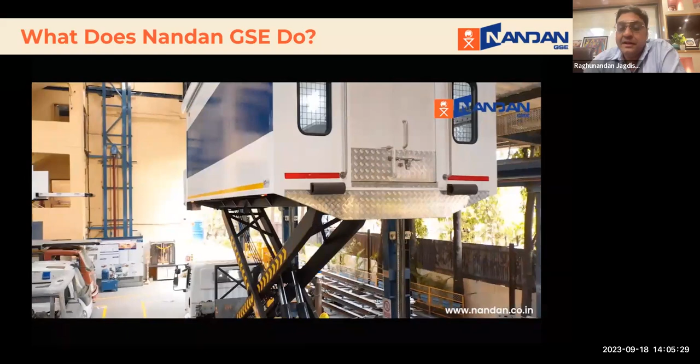So coming back to the factory - because for both chemical and pharma, it's not really a work-from-home kind of thing, you can't produce medicines or chemicals from home. The factory is an important angle wherever you are at.

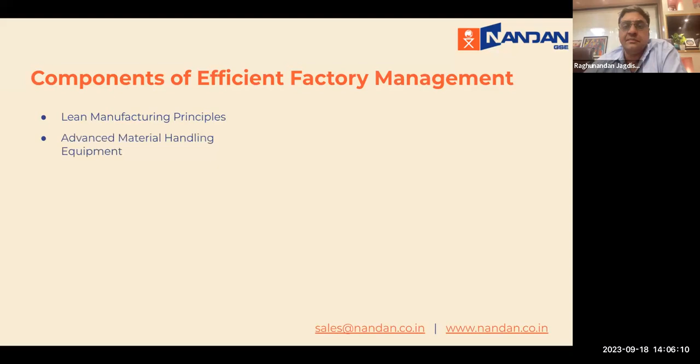So in terms of efficient factory management, there are a few principles, each a topic in itself. Lean manufacturing practices are really the ones which will help you save, and material handling is core to that. You can look at efficient production scheduling, real-time monitoring, analytics using a lot of IoT and ML as it goes ahead. Factories are getting smarter.

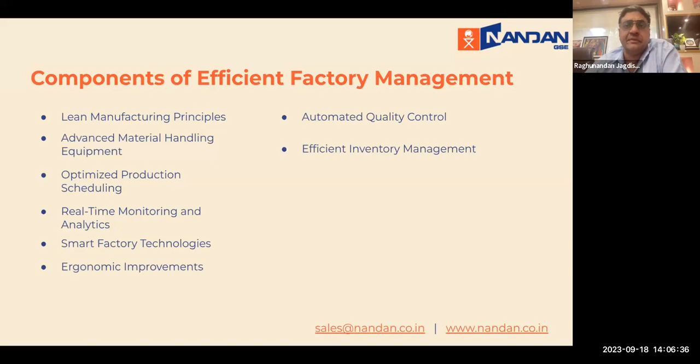I'm not too sure whether people are, but yes, factories are getting smarter. There's a lot of ergonomic improvements happening, and a lot of QC is today automated, where automatically down the line you're able to create that. You're using a lot of energy efficiency. Even at Nandan, for example, we have 60% of our power coming from solar. So sustainability is very important in everything we're doing. And there is a lot of cross training that happens.

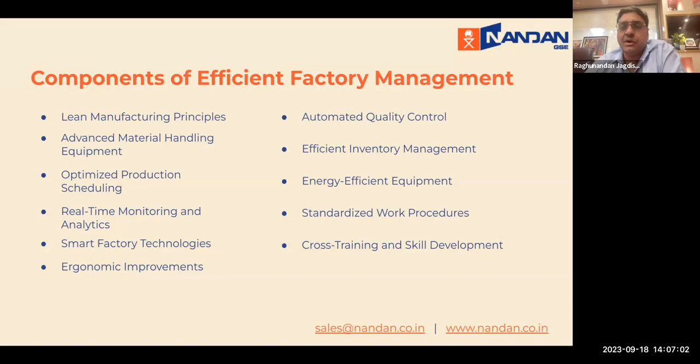So from all these topics that you saw in the previous one, I am going to basically focus on the material handling bit. What are the small things that you can do on an immediate basis to improve yourself there? So when the focus is on efficient material handling, that's core to what I'm going to be talking to you about. My name is Dr.

Raghunandan Jagdish, as was introduced by Sangarsh, and I've been the CEO of Nandan for a long time, and we are working on improving productivity, performance, and safety. So I think I know a little bit or two about material handling. That's why we're sharing this.

You need to identify your bottlenecks. Bottlenecks are those places within the factory where everything comes and gets stalled. So even if you eliminate bottlenecks immediately, your factory efficiency can go up by 13% by zero cost improvement. So that's an important part.

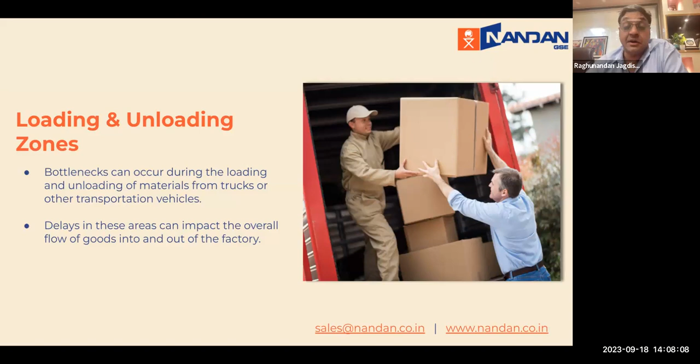And in those bottlenecks, your loading unloading zones are an important place where trucks can come, they stall, they block the space, they block the time. There's a lot of manual handling. There's ergonomic problems because people are handling them in a very unsafe manner.

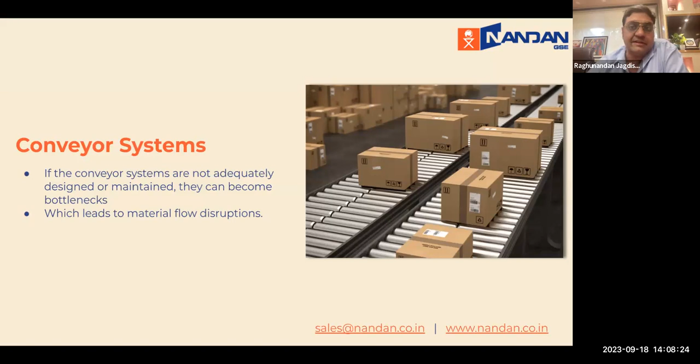Conveyor systems, yes, you do have conveyors all throughout the factory, but if they're not well designed, the speed of the conveyors, the location, the way the transfers are done, it could lead to some bit of bottlenecking and inefficiency.

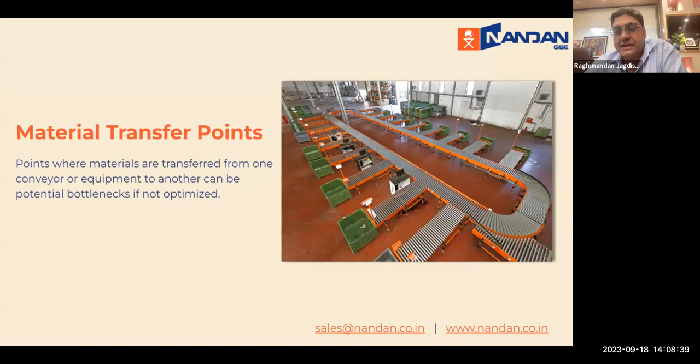Material transfer points are an important one. The more the material transfer points, the more flexible the system should be. But what also happens at some point of time or the other, the system can collapse. So you need to be very careful about it.

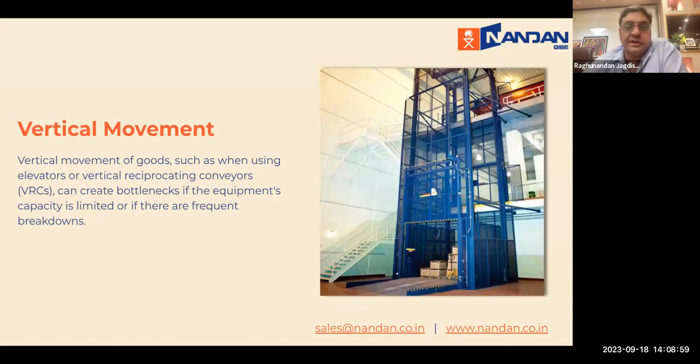There's a lot of vertical material movement, that is from the ground floor to the upper levels, that you need to take. Waiting for the lift breaking down, things not fitting inside - these are all problems that do occur in vertical movement. So you need to be very careful about that, and they will create a lot of bottlenecks in the system.

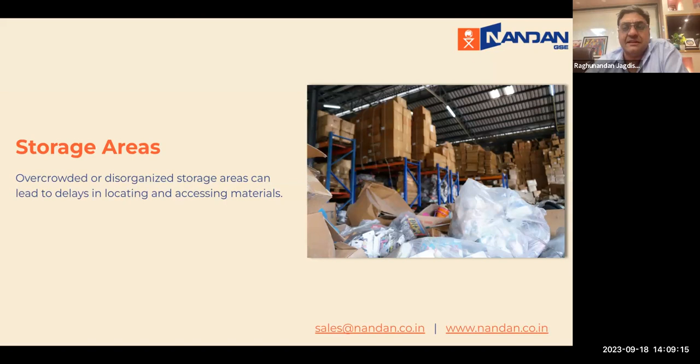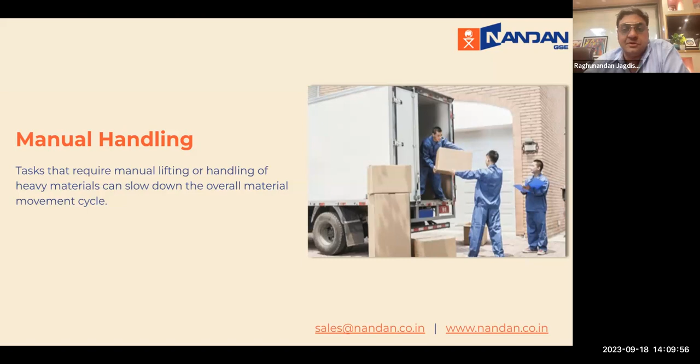So when you design your own factories and layouts, be very careful about them. Again, wherever there is manual handling involved, that means a man can only lift 30 kgs, or if he's really strong, about 50 kgs, but not more than that. And even that has a long-term impact on his health. So wherever there is manual handling involved, there is going to be a slowdown, and there are going to be risks which will lead to bottlenecks.

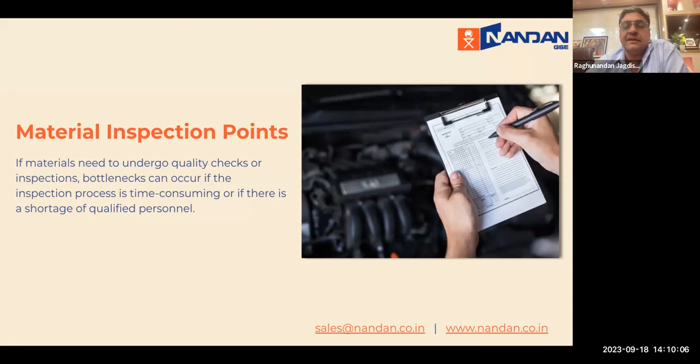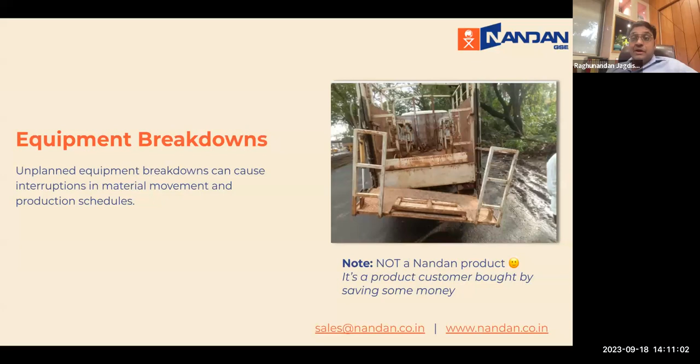And at other times, you might want to do handling, but you don't have equipment, so the quantity might be less. Since we're talking about the two core industries of pharma and chemical, there is a lot of similarity in what you're trying to do.

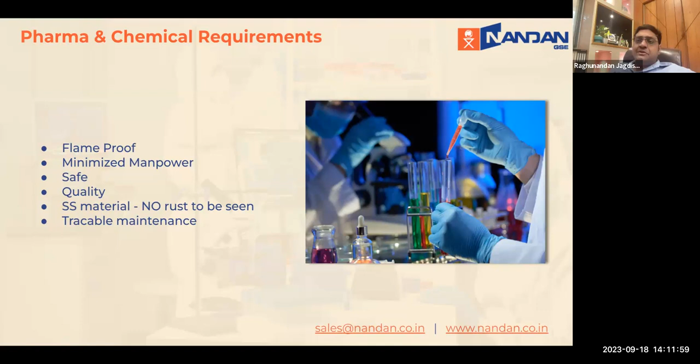You want most of your equipment to be flame proof because chemicals or pharma too, there could be a lot of fire hazards. So in order to mitigate that, you will always need to flame proof your equipment of all sorts. You want to minimize manpower because the more the number of people, the more the risks. You want it to be safe and have high quality, of course. Most of the material should be stainless steel so that no rusting is seen anywhere. And there has to be a traceable maintenance, which is definitely part of GMP, the good manufacturing practices. In fact, even ISO 9001 requires that you keep maintenance traceability.

Yeah, that's a few thoughts on the material handling that comes in. And now what I'm trying to give you is... but coming back to the topic at hand, which we began with, I would like for you to again look into this.

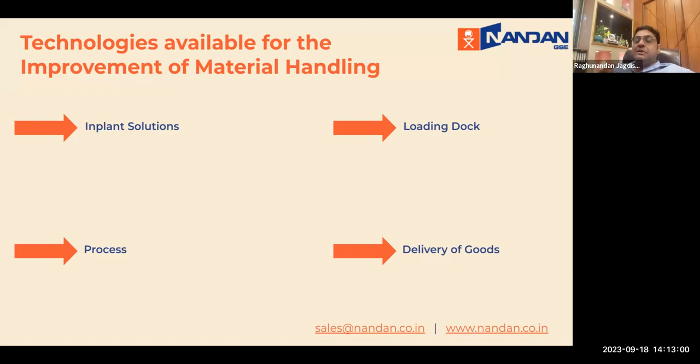So a few of the technologies that are available, again we divide it into 4 parts. You have inplant solutions that is within your factory. You have the dock, the truck interface, loading, unloading. You have during the process and also delivery of the goods at the customer's end.

So in inplant, one of the solutions you can use is a hydraulic scissor lift. A scissor lift, because it has got an X and it's called a scissor, is a fantastic mechanism in which the platform remains horizontal always and it goes up and down. You can use this from anywhere between 500 kg capacity right up to 100 tons to move the material up and down.

It's got a lot of complexities like ramps on either side. It could have rollers, conveyors, tilters, etc. So for movement of material between two levels, instead of having a slope, you would just put a scissor lift there, put your thing on it and go up and take it out. That saves a lot of effort for the human being, plus it improves your safety requirements.

Second, you of course have pallet trucks, which are ubiquitous everywhere in the pharma and chemical industry. But if you go for a battery operated one, it makes the move very simple. It's always braking automatically, it won't roll down, and one person can move even 1 ton very easily. This is more important because nowadays in factories there's a lot of female workforce, and when they come in, they find it difficult to move the pallet truck. Battery operated pallet trucks make it very easy.

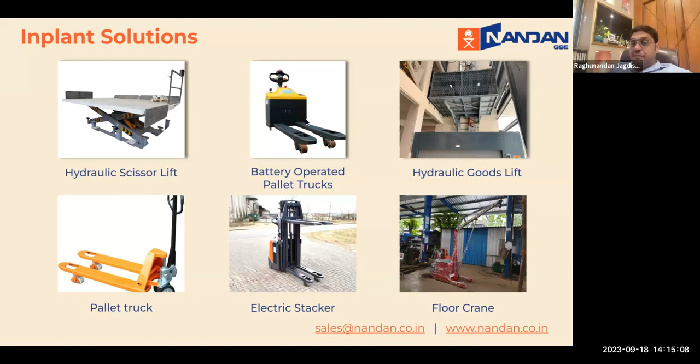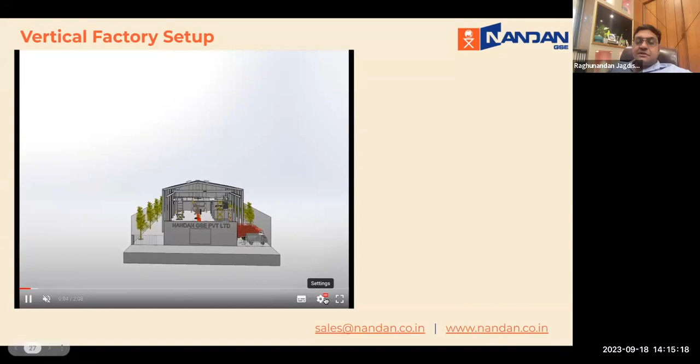So you can make it go as high as possible. Within the factory, when you want to move material vertically, you can think about the hydraulic goods lift. For loading and unloading, you can think about the stacker or the crane. For movement of material, you use battery operated pallet trucks, etc. So I'd like to show you something that my team has made, it's a system called... yeah, it's a system called vertical factory.

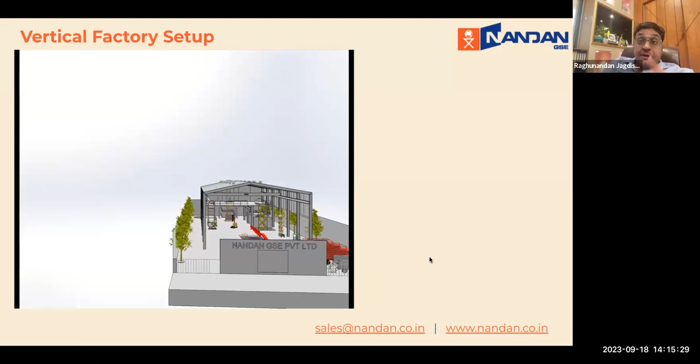Typically, what are the different systems that you can use within the factory to make your movement more efficient?

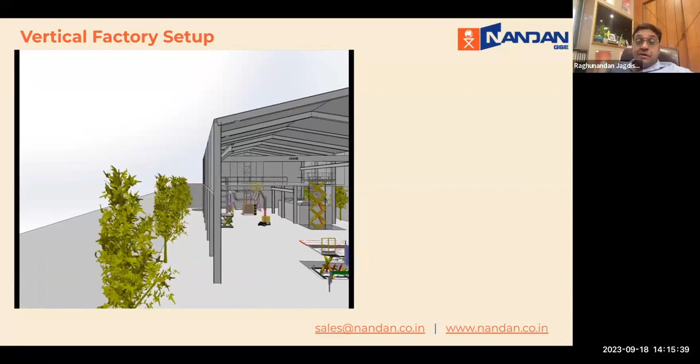This is an animation, work in progress. You're one of the first clients to actually see it, but I thought imperfect action is better than perfect inaction.

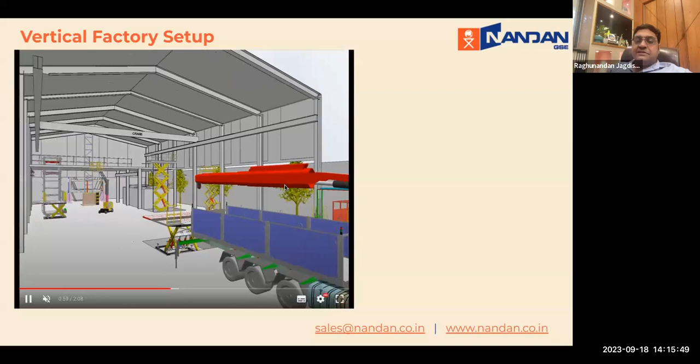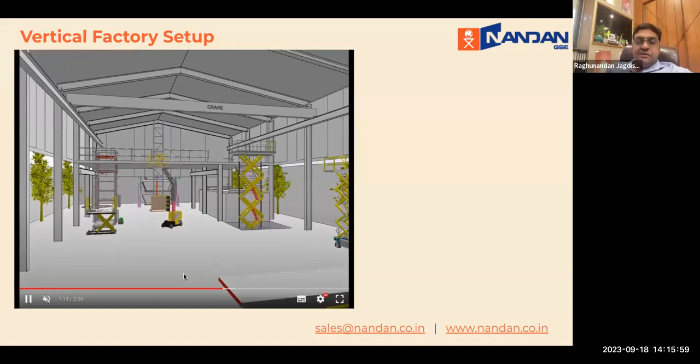We have knuckle boom cranes that are useful for loading and unloading trucks. That is how a scissor lift is used to unload from the truck, so you can get it on the scissor, and then the lift comes down and you take it down. This can be with wheels so that you can move them around. This is a goods lift.

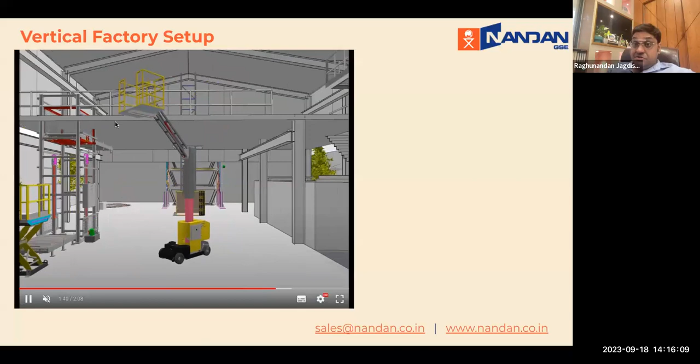If you make a mezzanine, which is very predominant in chemical and pharma, you can install a goods lift without any RCC work. It is fully freestanding and you can get this going.

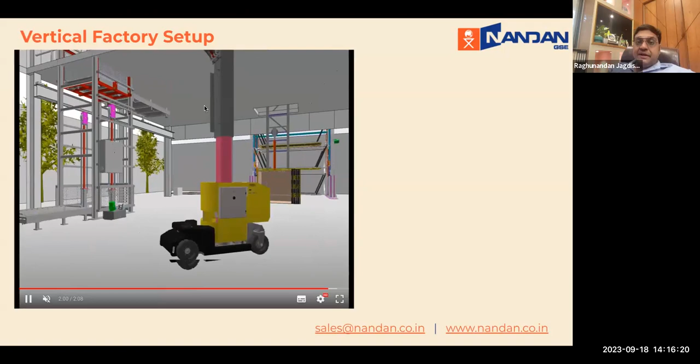For vertical reach of your machines, you have different systems. You can rotate trolleys, you can rotate trucks on a system called a turntable. This turntable is on the ground, and it can rotate 360 degrees.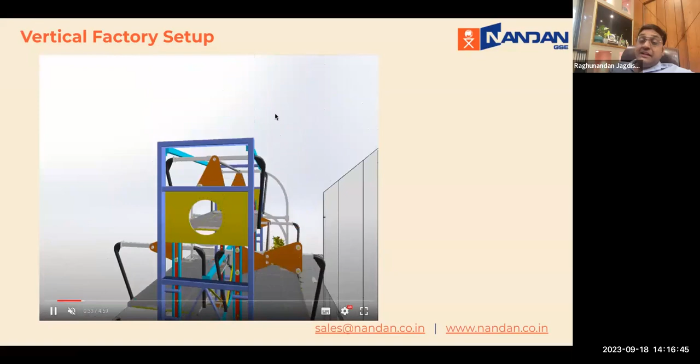For parking or material storage vertically, you have a carousel. In this carousel, you don't need a forklift to load material and keep it at height. You just put it down on the ground floor and press a button, it rotates, comes down, and you remove the pallet from that. So everything is on the ground level.

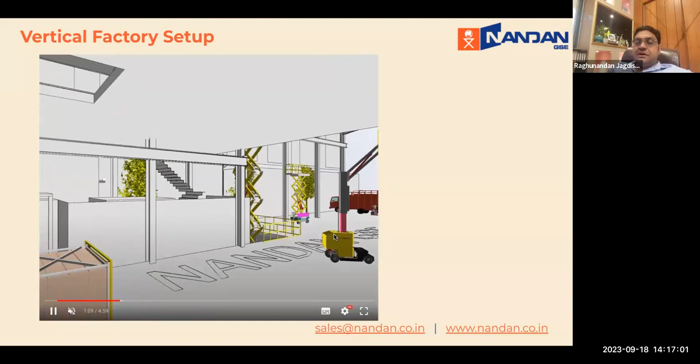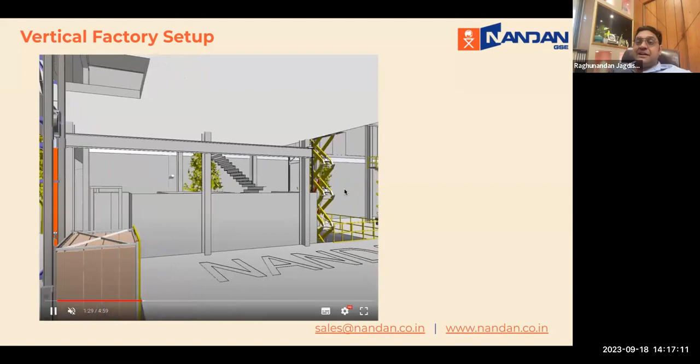That's a hydraulic lift again. However, you can see that this is a scissor lift. A scissor lift is not just 1x, it can go multiple heights. Because of the scissor lift reaching multiple heights, you can install them and make your mezzanine more useful. Without a separate lift, you can just install a lift like that, make a pit, and put it down.

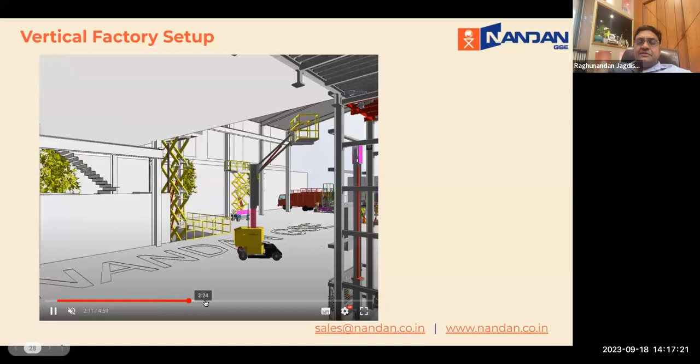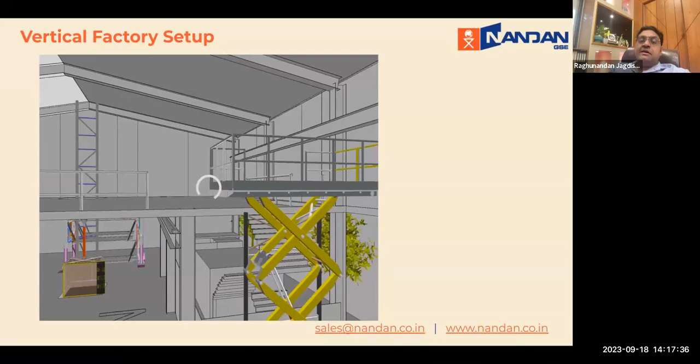We do have different kinds of truck loading and unloading systems, called column tail lifts. Instead of moving material by hand, you would just use a trolley to move things. So even here, the steps are only for human walking, but the materials are sent up and down in the scissor lift itself.

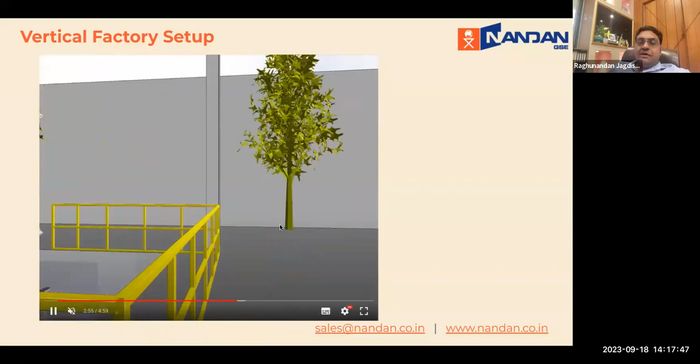So that's a scissor lift going up and down. We have towing scissor lifts, useful for maintenance. OSHA's regulations state that you can't go more than 3 meters using a ladder.

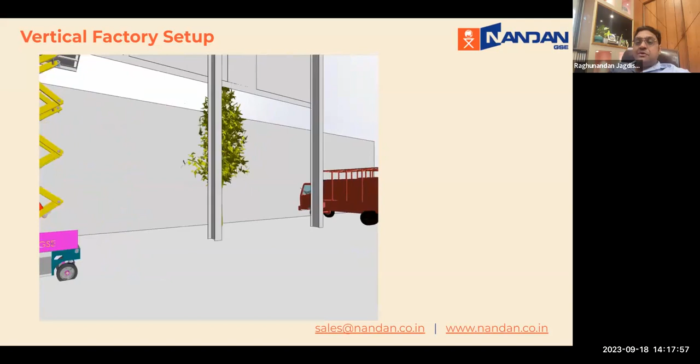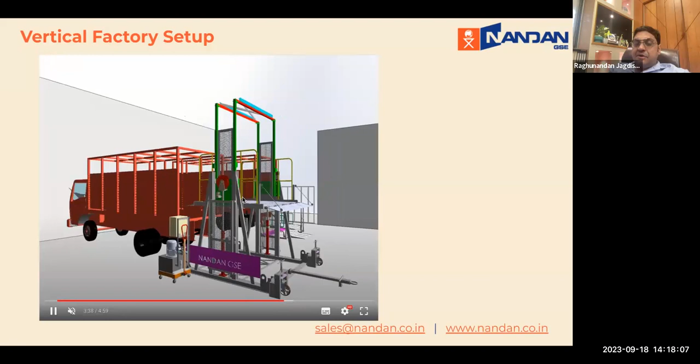So you need to be very careful when dealing with an international audience and want to remain compliant with the laws. You can have this, called a towable truck loader. The platform goes up and down and you can load into a truck without a dock. When it comes down, it is fully on the ground and loads into the truck.

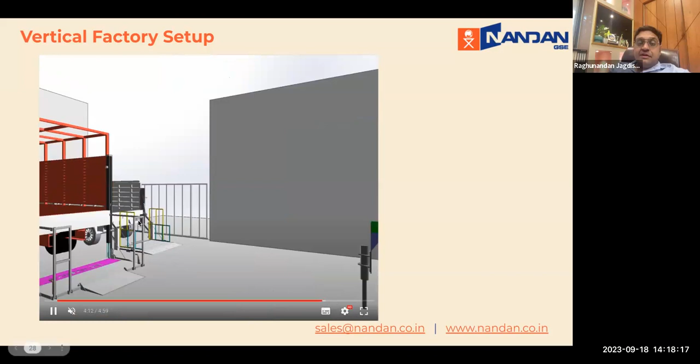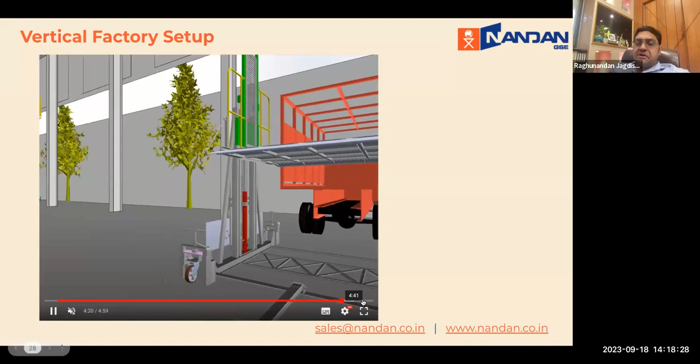There are different kinds of tail lifts on truck backs, which you can just load onto the truck itself and use for deliveries. Most of the time your logistics companies would do that, but in your case, maybe that becomes a sustainability point.

In short, that is like a vertical factory, how it goes. Hydraulic goods lifts are useful for traveling up and down. You can make them freestanding, or you can put them into a shaft.

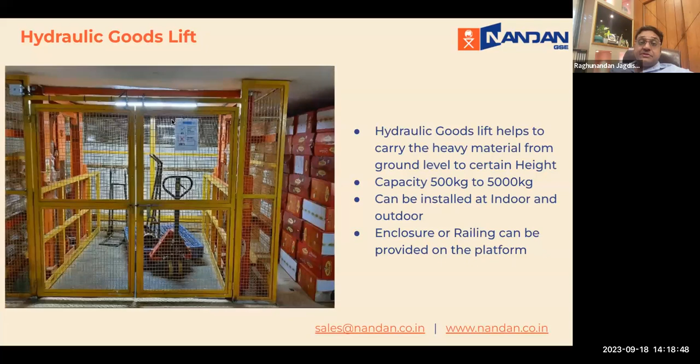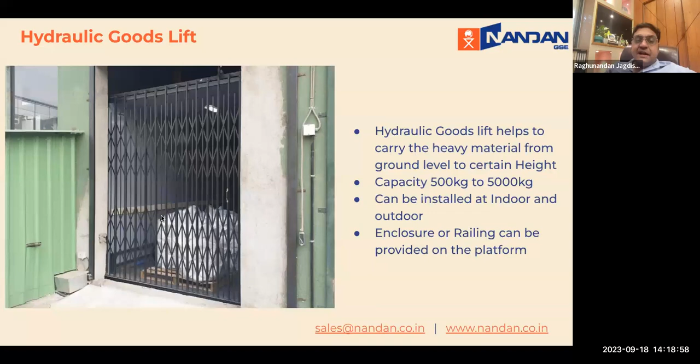You can make it go as high as 25 meters, and you can make capacities as much as 10 tons. We've done a 10-ton lift, which takes a forklift plus a lot of material and goes up and down. The benefits are, because it is hydraulic, there is no rope breaking, it's much more energy efficient, and it's got a very long service life.

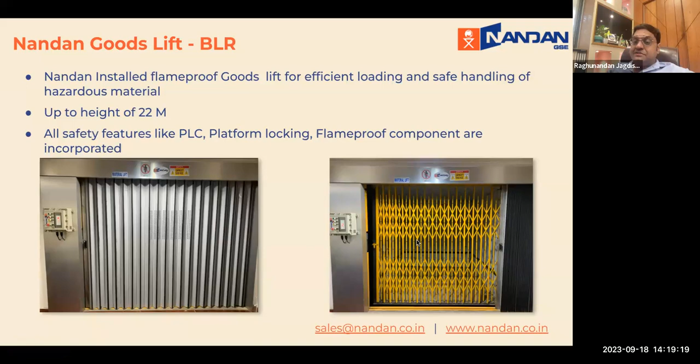We installed this at one of the customers' places in Bangalore. You can see it's flame-proof equipment. It's got different buttons with an HMI and a lot of displays, stainless steel all around, different kinds of gates, collapsible, imperforated, vertically going up and down. That's how it looks like in operation.

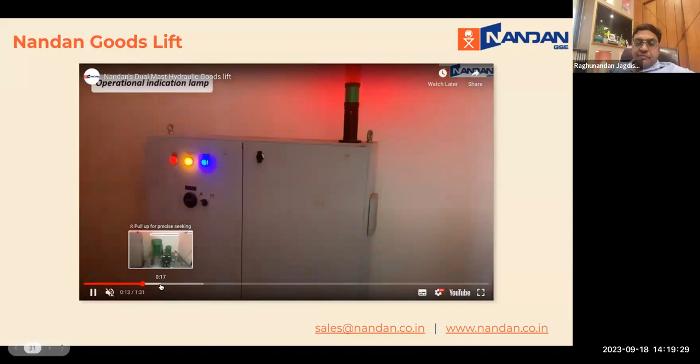So the flame-proof power packs are made. This is called a vertical. This again is a new technology we are introducing into the material lift system.

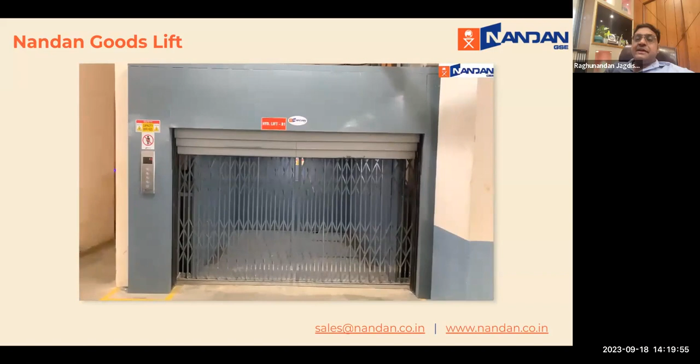You can see the controls are very aesthetic. They are very robust. The cabin itself has collapsible gates, but the vertical closing gates are automated. This is making your operations very safe. And then the lift goes up.

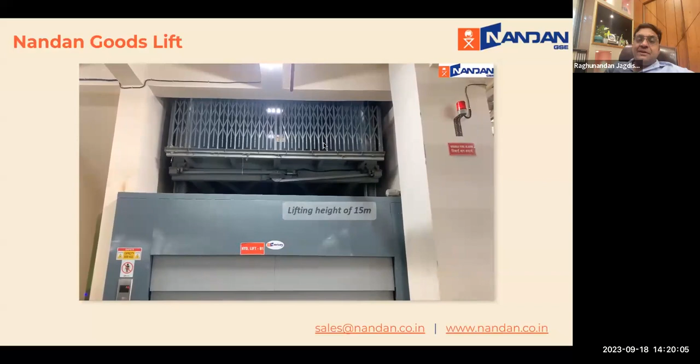Typically, in the hydraulic goods lift, we do not design for man-riding. It doesn't have a man rider. And once it goes to that particular location, there is a system called a mechanical lock.

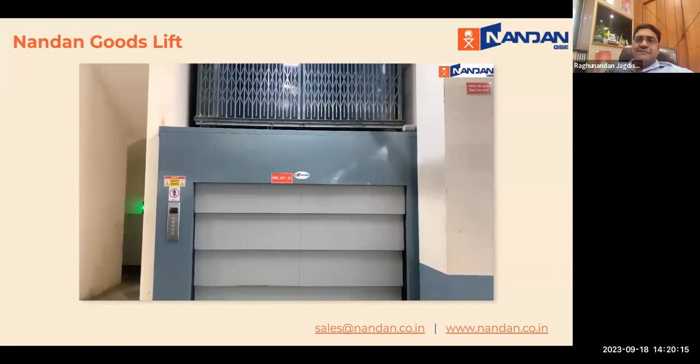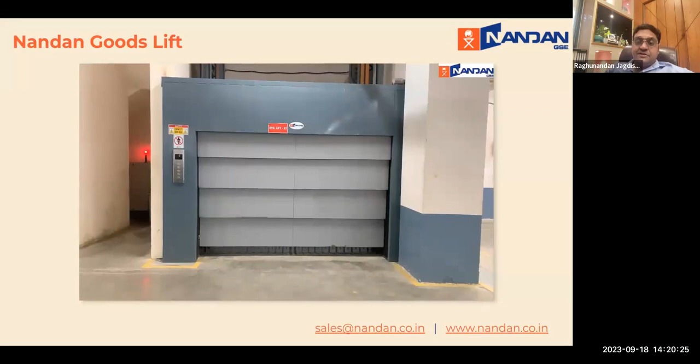So the lock gets deployed and you can move your pallet out. Unlike other conventional, economical lifts where there is no lock, there is a possibility of jumping and rope breakage. In this, it's not there at all.

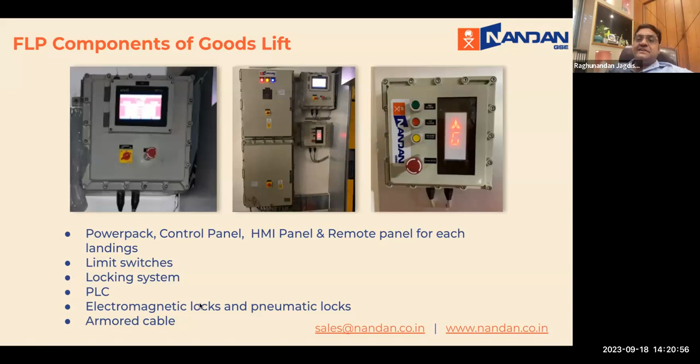As you can see, we do have displays. We have an HMI which captures a lot of information and keeps them. This can be put up in non-flame proof ones also, but the box itself is flame proof, rated by the CMI. There are electromagnetic locks and pneumatic locks which make sure the gates are locked, your lift is in place and travels safely, giving you fantastic safety.

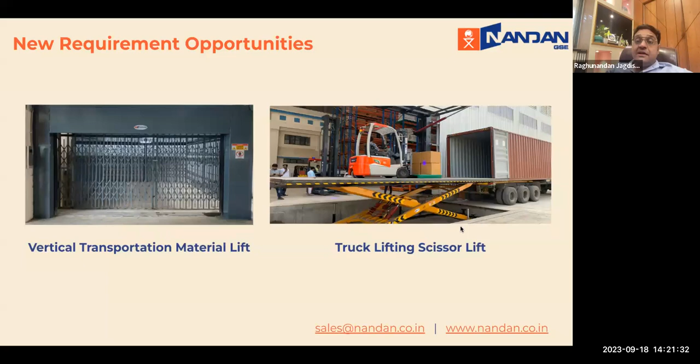We can make similar things for man-cum-material, passenger-cum-goods lifts, truck loading scissor lifts, maintenance lifts to go to heights up to 16 meters, and customized loading systems.

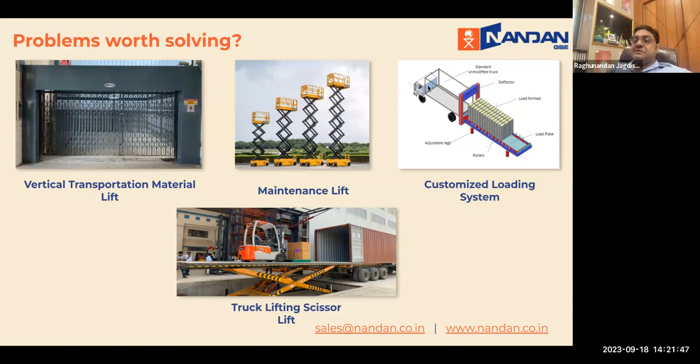So one similar system can get through. If you're exporting in bulk from your location, we do have container loaders and unloaders. At least for chemicals, yes, it makes a lot of sense.

You can just put in a liner and the whole 25 tons can be poured in, and you use this like a big box storage. The logistics company will give you the container itself, and your cost of packaging goes down dramatically.

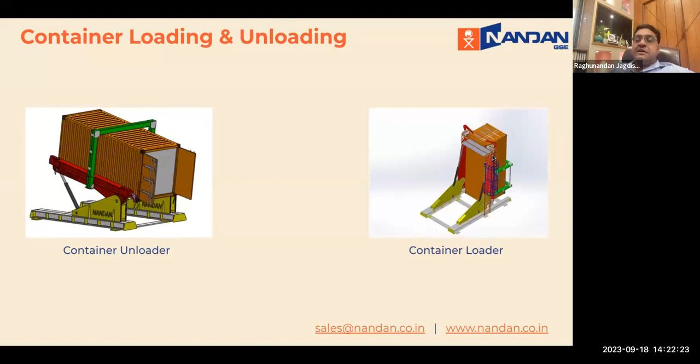Back of the envelope calculation: if today one jumbo bag costs about 800 rupees, and you have 25 of them for 25 tons in one container, you are looking at a lot of money - about 20,000 rupees only in packaging cost. Whereas if you use a liner, it will cost you maybe 2,000 rupees for the liner. You save 18,000 rupees there.

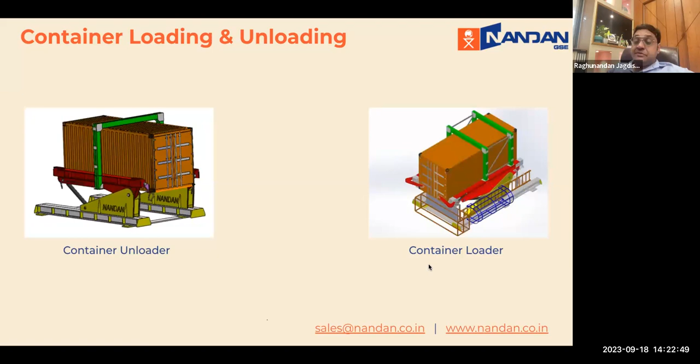And that can get unloaded from the container at the other side. You can use this for dry powder, as well as for different kinds of input raw materials.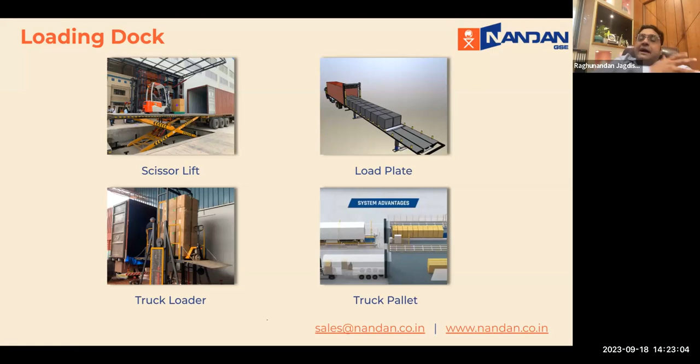So these are some other dock systems. The truck loader can load and unload any truck, even if you don't have a dock. So if you have a warehouse that you don't own, you can't really make equipment and put them there. This helps you to make that easier.

I'd like to show you one idea. This is not ours, this is from a collaborator from Europe. You can see if you're using a forklift to load a container, how much time it takes.

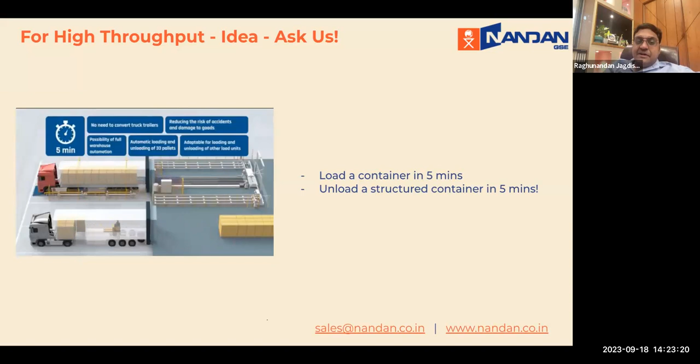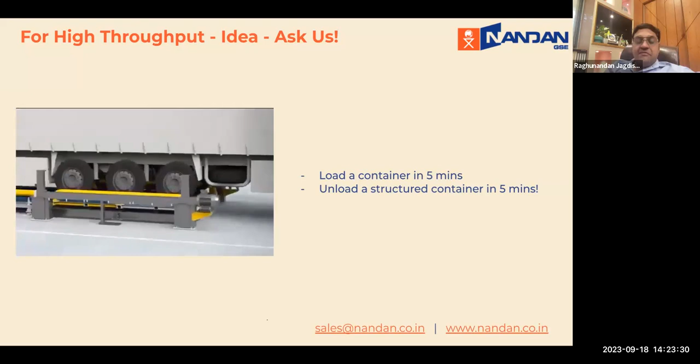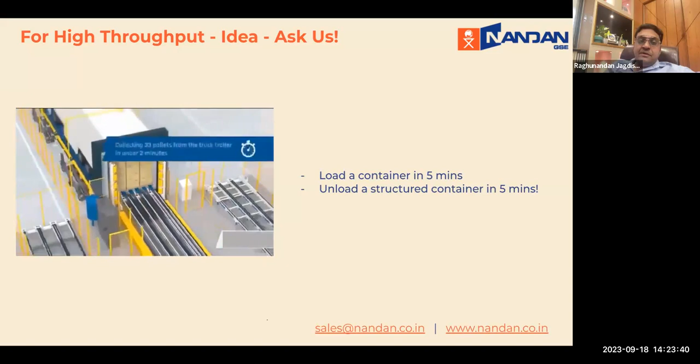Whereas on the other side, there's an automatic system in which the truck just comes in. It gets attached by adjusting to its height, everything automatic. There is a fork system that is just pushed in. It lifts up using a pneumatic balloon, and the entire pallets are then got back. Once it comes back, the truck can be released. And here again, you can automate this so that each pallet is removed and taken.

So if you want to talk about it and other things, you're more than welcome.

For delivering of goods, you do have knuckle boom cranes and column tail lifts. Knuckle boom cranes are not very useful if you're handling a lot of bulk and palletized material, but column tail lift can. Even if you want to move it between your factories, it will be very useful to buy one truck and get it going.

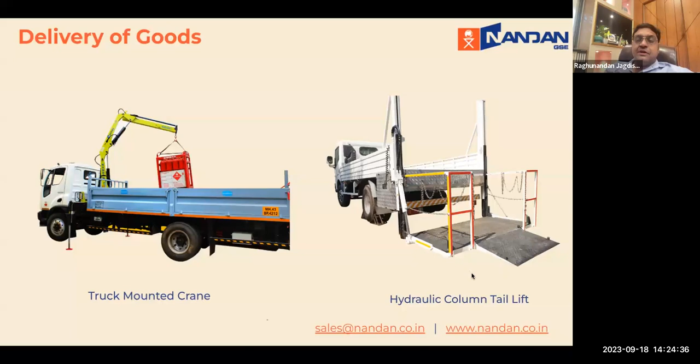We have a customer who is a chemical company, and he invested in this truck mounted column tail lift, not very expensive too, and he was able to save that money in terms of labor salaries in a matter of about 7 to 8 months. So this is a very useful method for you to move also.

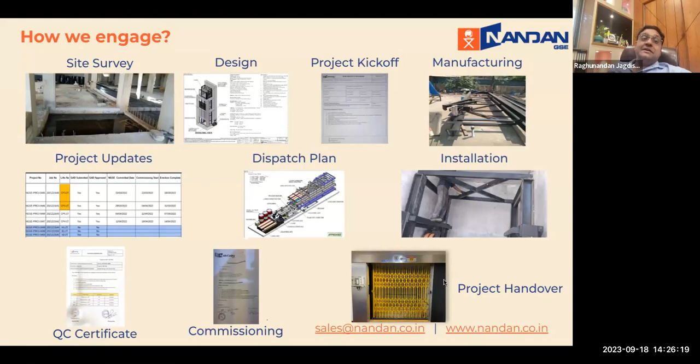Project updates are constantly given. We have a fantastic PPC team who always update the customer at the right time. There is a dispatch plan made so we know how to dispatch it and how it is to be kept. Installation starts, and after installation our QC tests it and gives the QC certificate. We show it to the client, get their sign-off, and then the project is handed over. This whole approach is very systematic, which is not really seen in the material handling industry.

We do things like shot blasting and painting, which even if you don't ask for, is mostly done as standard in most of our equipment.

There is an installation and commissioning where our highly trained engineers come to your site and train your team. We don't just show them which button to press, we train them in the do's and don'ts. We show them the SOPs, make videos and PPTs to help train operators, do a chartered engineer test, and then hand it over to you.

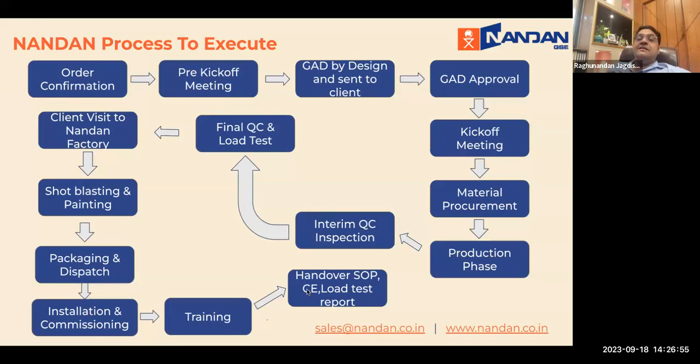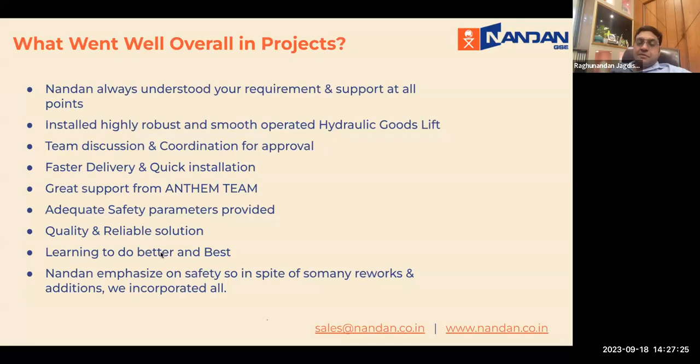We always work with safety parameters. Our team never works on site without PPE or whatever else is needed, so that we don't pass on any risk to you. These are quality and reliable solutions, and we are always learning to do better in many ways. Wherever you come up with any issue, we give you answers there.

All in all, like I promised, I generally deliver before time. So, you can always contact us at sales@nandan.co.in.